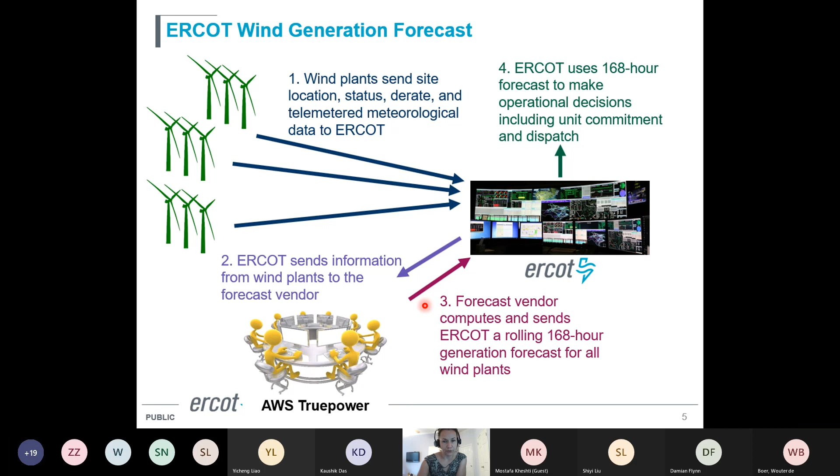So I mentioned in the beginning a little bit about our geography. So Texas is big, and Texas is also long. So if you look at it corner to corner, Texas is 1,300 kilometers. And what I wanted to mention is that areas that are rich in wind resource are over here, this Texas Panhandle, it's called, and I'll talk a lot about this area today. So just wanted to point that out.

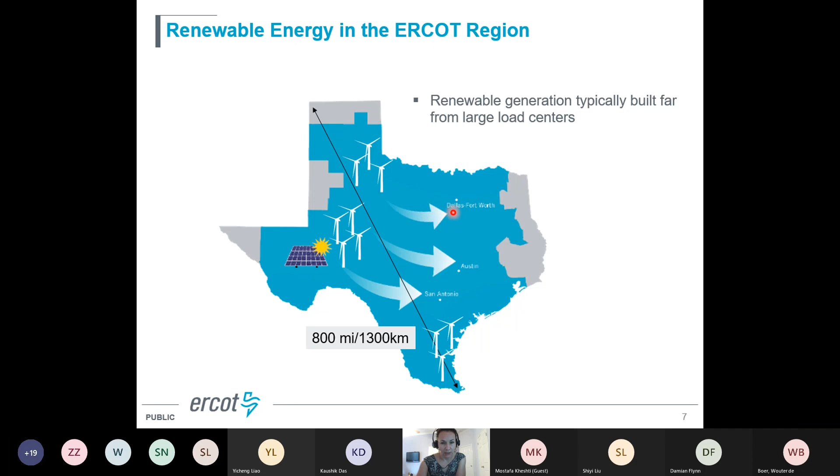And then also West Texas is rich in wind, and solar is being built there. There is a map from NREL that I don't have on slides here, but if you look at it, it's an irradiance map. The highest irradiance for solar potential is in this area for Texas. However, if you look at this map, the biggest cities in Texas are all on this side. So this results in long distance transmission from areas rich in renewables to load centers. And that has its own set of challenges that I'll talk about much more. So this is all I wanted to point out on the slide.

I'll talk next about two big groups of challenges, one being weak grid instability, and the other one being inertia and frequency control. I intentionally have them in this order because in our area, weak grid instability issues are much more pressing than inertia and frequency. And this is partly because of some measures we already implemented to address frequency, but also because of characteristics of our system.

And with that, there are stability challenges associated with weak grid conditions. What it basically means is you're trying to control voltage in this area, and inverters are fighting each other because they are all controlling voltage in a fast manner. And that resulted in voltage oscillations. This is a measurement from an actual event in 2012. And so after we recognized this issue, there were a number of measures taken.

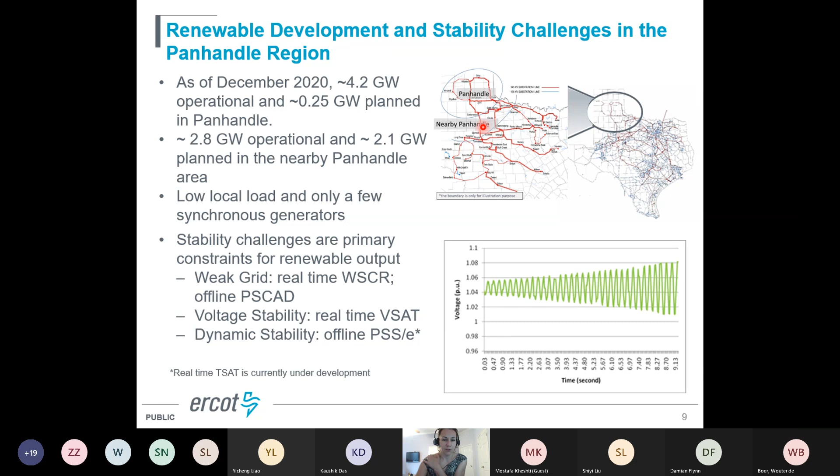And it brought two small synchronous generators with combined capacity of about 120 megawatts. So that area improved a lot because of this interconnection of Lubbock, and some of the measures that I'll be talking about are not in place anymore because of this. But I thought it was still interesting to mention those.

And so it may have overly optimistic estimation of system strength for a given bus. And so since then, for the Panhandle area specifically, we proposed this weighted short circuit ratio. It basically treats the entire Panhandle area as one bus, and it recognizes that there are other inverter-based resources in the area, not just the one that you are looking at during the interconnection process. And so it assumes that they are all interacting, and we proposed 1.5 as a minimum pre-contingency system strength for Panhandle. Initially, it was based on PSCAD studies, as I mentioned.

So currently, sorry, I'll just mention it here. We actually also verified this 1.5 short circuit ratio in electromagnetic transient studies. We found that at different conditions below 1.5 ratio, the system can be operated stably, but you need to be changing this limit based on system configuration at any given time. So because this became kind of impractical in real time, we set the limit at 1.5, and it's been maintained in Panhandle. Inverter-based resources, mainly wind in this area, are being curtailed as long as we see that weighted short circuit ratio is less than 1.5.

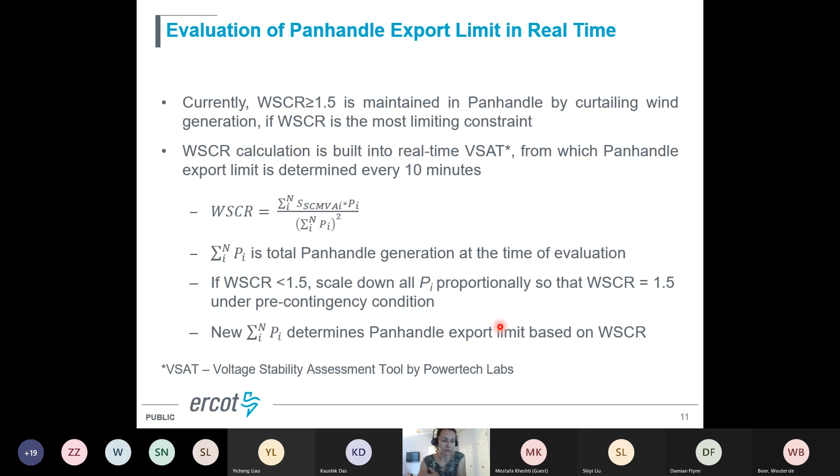When it calculates this limit, it of course considers current network topology and wind conditions and all of that kind of more real-time data. So this is just showing the real-time transmission limit, as I mentioned, either due to voltage stability or weighted short circuit ratio, whichever happened to be less at the time. And you can see that it varies over time. It is an advantage of doing it in real time because it allows us to operate more flexibly instead of setting a limit very low and then curtailing wind more than it should.

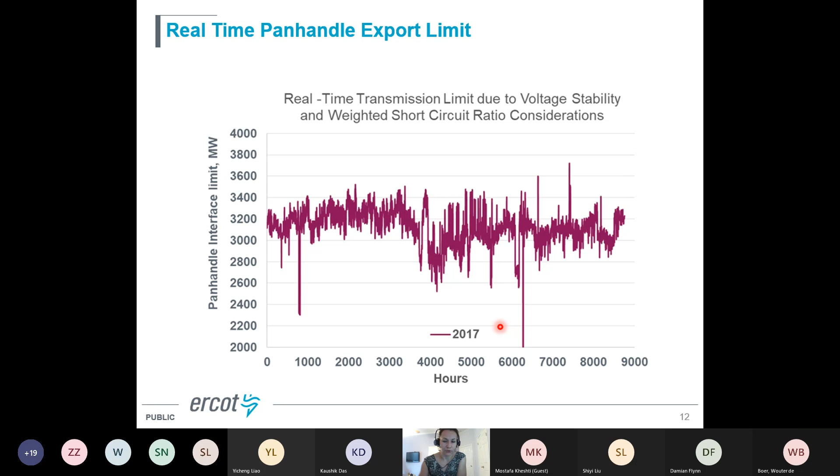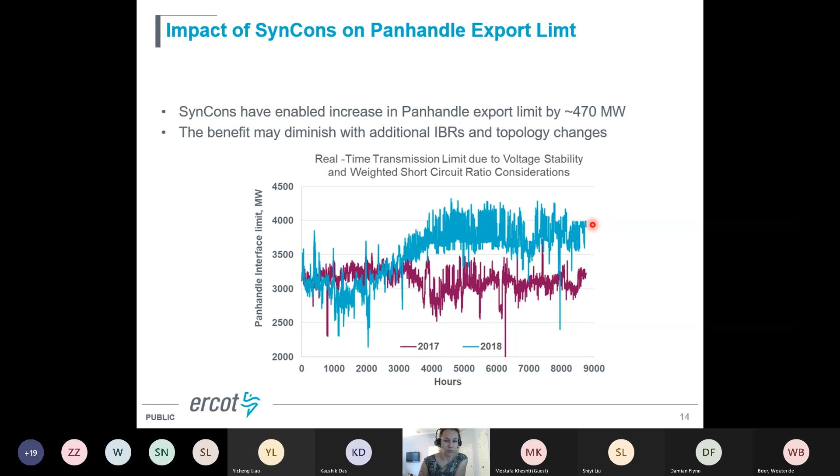And so here you can see, once we added the synchronous condensers, the export limit could be increased by about 470 megawatts. You can see this blue line. This is 2018, and when the synchronous condensers were added, you can see that the transfer limit is going up. But what happened when we added synchronous condensers is that we now had a situation where we have 2 relatively small synchronous machines far away from the rest of the synchronous generation.

As I mentioned on the Texas map, the Texas Panhandle is in the upper corner of the map, and all large synchronous generators are on the central to east side of the system. And so there is long power transfer between these 2 parts, and having synchronous machines there resulted in this kind of classical inter-area oscillation during certain wind conditions and system operating conditions. When export was high from Panhandle and we transfer a lot along these long transmission lines, after a contingency, we see oscillations between the synchronous condensers in Panhandle and the rest of the grid. So basically solving one problem of weak grid by introducing synchronous condensers introduced another problem of these power oscillations.

What could have been done in advance, had we thought about this problem? Probably there are synchronous condensers that are equipped with power system stabilizers, which a regular synchronous generator would normally have. And our synchronous condensers are not equipped with that. I'm aware of synchronous condensers installed in Australia, and they have a flywheel for inertia, and they have a power system stabilizer to avoid these oscillations.

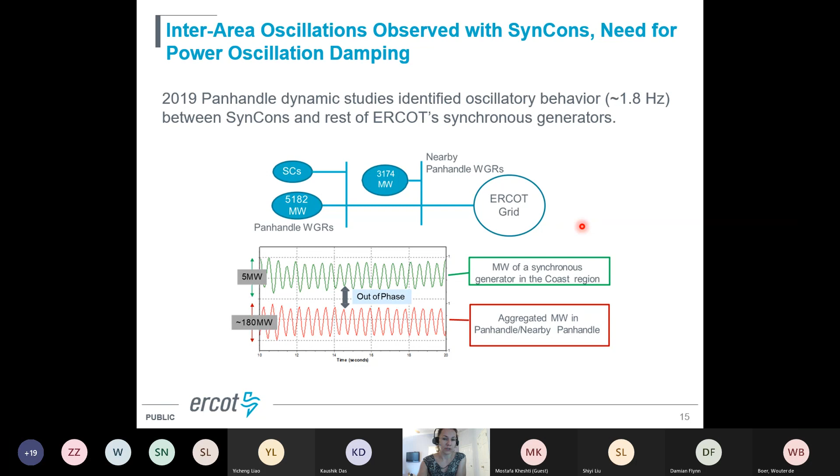But in the stakeholder process, we got a lot of pushback saying that this is not a fully tested product, not commercially available. It requires a lot of testing and customized design for a given system and system conditions to work properly. So more work is needed to have this feature.

And so stability constraints need to be assessed in the offline studies, and then we need to implement them in our real-time market because we need to dispatch around those constraints in real time. And these constraints are not necessarily on just one line, they may be on corridors like Panhandle is. So they're relatively complex. It's not only about defining the constraint itself, but also about defining the limit on this constraint, and the limit will vary in time.

So we fix the constraint based on our offline studies, planning studies, but then closer to real time, based on topology at the time, we use offline static tables to determine what the limit is on the constraint at any given time. And you can see we are seeing an increasing number of these constraints. In 2020, we had 15 of those. And so they're becoming hard to manage, and they complicate our real-time economic dispatch as well.

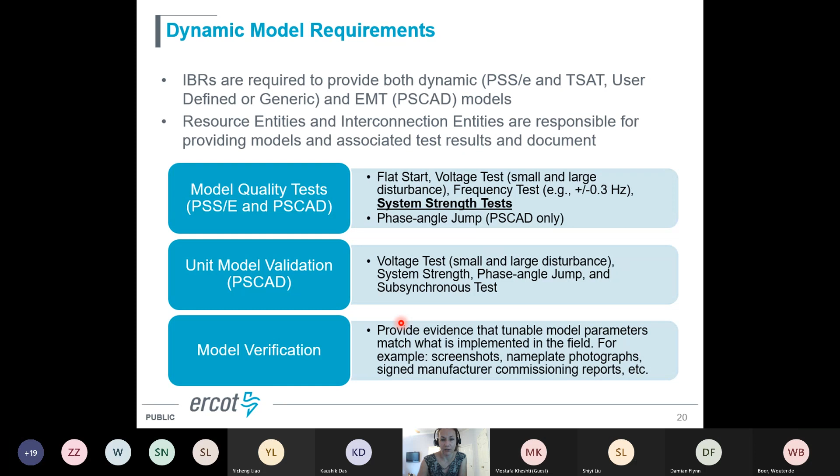And so recently we developed a process for them to test models on their side. It gives them a small test system where they can connect the model of their plant and do different tests. And they have to submit to us a test report before we accept this model. The test report should show acceptable responses and that there is consistency between PSCAD and PSS/E models. And only after that will we take the model, do our own verification, and then plug it into the rest of the ERCOT grid model.

So just in summary on weak grid and stability, as inverter-based resources are being developed in areas away from load centers and synchronous generators, we see an increasing number of stability constraints because these are weak grid areas. We noticed that simple metrics such as the weighted short circuit ratio may not be applicable in areas where you have load and other synchronous generation. It was very clean and clear for the Panhandle until we got the city of Lubbock interconnecting.

And we also noticed in South Texas that the weighted short circuit ratio could not be uniformly used in a similar way because the network is more meshed and has more synchronous generation and load there. Synchronous condensers are a good help for weak grid areas, but they also introduce other challenges for a grid like Texas. There are limitations of available dynamic tools and models that we can encounter in weak grid conditions.

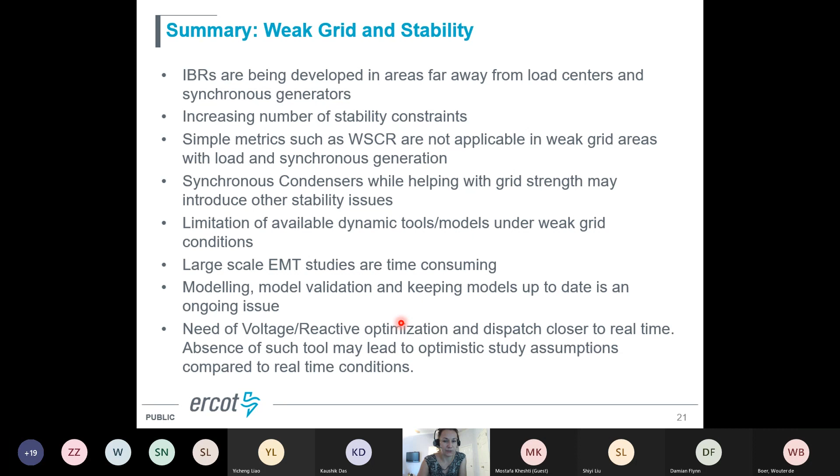Large electromagnetic transient models are time consuming, so we cannot do a big number of studies or do them in real time. Modeling, model validation, and keeping models up to date is an ongoing issue. And we're also looking for voltage and reactive optimization tools that could dispatch closer to real time. In the absence of such tools, the operation may be suboptimal and too optimistic compared to real time conditions.

So with that, I'll switch to inertia and frequency. I'll try to save maybe 15 minutes for questions, so I'll zoom through it a little bit faster.

So, you're probably all aware that the higher inertia you have, the lower rate of change of frequency it is after a trip of a large generator. Did I say the lower? So the higher inertia is, the lower rate of change of frequency is, and the lower inertia is, the higher rate of change of frequency is after a trip of a generator.

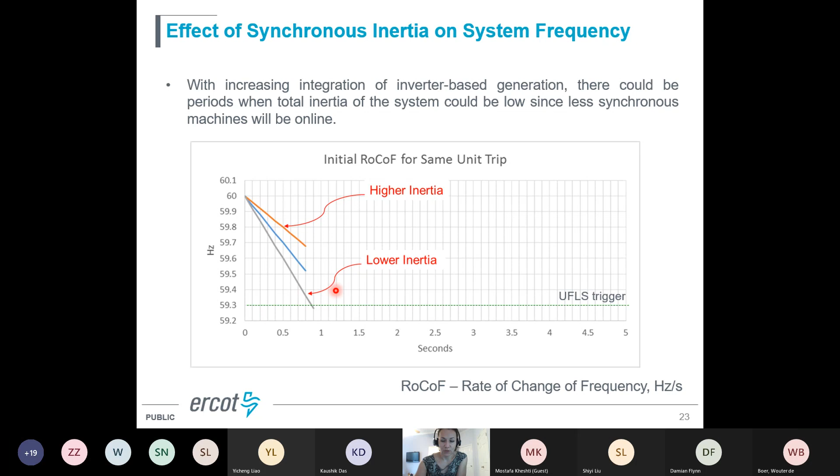And so if inertia is low, there is less time available before frequency falls too fast and reaches a trigger point for under frequency load shed. And this time is the time we have to arrest frequency and restore it back to 60 hertz. So this time needs to be taken into account when we implement measures for frequency control.

So we recognized that that's what's going on, that inverter-based resources are replacing synchronous generators. Inverter-based resources inherently don't have inertia. And so we started looking into that without seeing any issues on the grid. Actually, it was kind of preemptive from what we've seen happening elsewhere. And so in 2016, we implemented real-time inertia calculation.

We use inertia parameters of individual synchronous generators, and we use the online or offline status to calculate inertia for the entire system. We have telemetry from every generator with a lot of information in real time, and we get updated information every 4 seconds. So that provides an accurate account of what inertia is there from generation.

And of course, motor load also provides inertia contribution, but we cannot track it because we don't have real-time telemetry from it. So what we do consider is, when we do studies of how much inertia we need, we have load models, and part of these load models are motor loads. So we do consider motor load in the models, because when we determine how much inertia we need, that inertia is only related to synchronous generators.

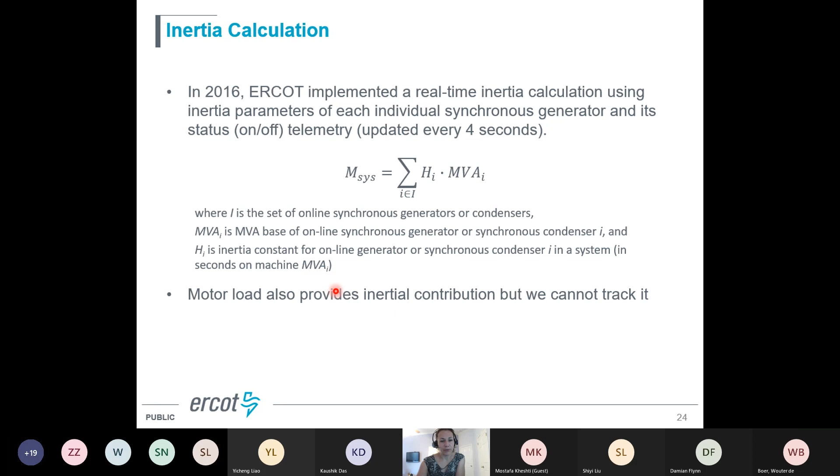But it's also, of course, not accurate, because in real time you may have more motors or fewer motors on than what we had in the model. So we do consider it, but it's not real-time accurate. That's what I wanted to say.

But what we use here is the intended status, and we use that status to calculate what inertia is going to be going forward. Of course, these plans are more accurate for the next maybe 24 hours, and then they're not very accurate, but we also don't need to forecast inertia that far ahead. And as I mentioned, they update those plans every hour, so we have an opportunity to update every hour.

We also split by generation type, but we don't use this in operations. This is just for historic analysis, for trending analysis. We've calculated what our critical inertia is, and we define it as a minimum level of system inertia at or below which the system cannot be operated reliably with the frequency control practices that we have in place today.

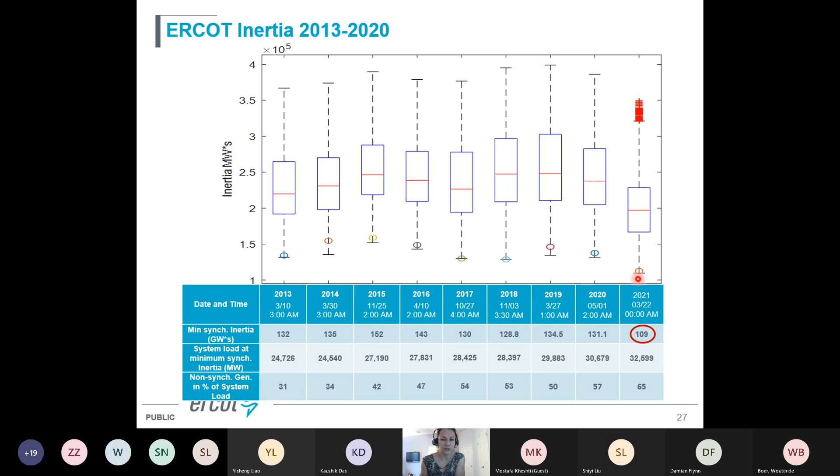We did see close to 100 gigawatt seconds of inertia this year. And we are still kind of looking if this will repeat itself. We had a lot of wind in this March, and also a lot of plants on maintenance during this month of March, and so maybe that's what affected it. But it could be an outlier. We are not sure if we'll continue seeing this trend in the coming years. But this is primarily due to several factors.

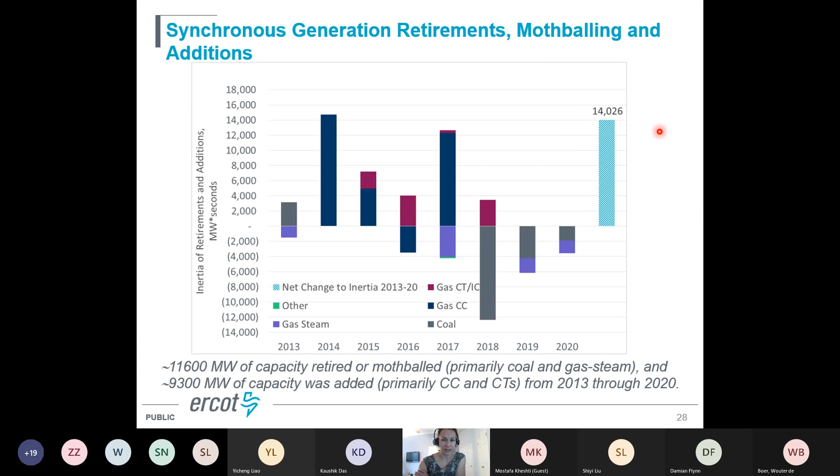And just to mention, a combined cycle unit of the same size as a coal unit has 1.5 times higher inertia. And this is because it has more rotating parts and more mass, and so provides higher inertia. So overall, this entire retirement and installation of new synchronous generators resulted in a net increase of inertia in terms of installed inertia that we have. So it's not necessarily that all of this is online at any given time, but in terms of what we have installed, we actually added inertia to the system, and that is one of the explanations why the trend is not declining.

I mentioned frequency response measures that are important, and the timing of these measures is important if your inertia is lower and the size of your contingency is large. So previously about 50%, now it's 60% of frequency containment reserve was provided by load resources with under frequency relays. The second half was provided by generation resources with governor response or primary frequency response.

We recently added fast frequency response service as well, and this is 1/4 second response time, full response, and sustained time is 15 minutes. And so this one is to address times when we have lower inertia, and this may help us to reduce the amount of frequency containment reserve that we're carrying.

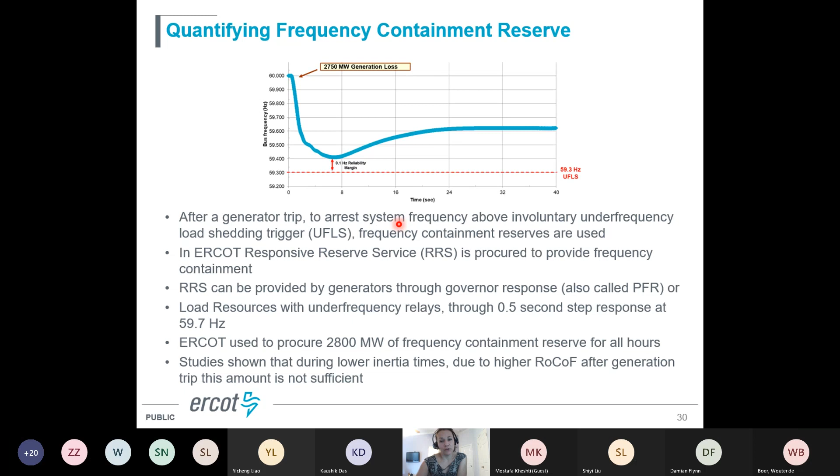You know, I'm kind of running short on time. I think I'll skip a couple of slides here. This basically is talking about the method that we use to determine varying amounts of frequency containment reserves based on inertia. And so that resulted in, and this is an important chart here, I think, at different inertia conditions, we require different amounts of frequency containment reserve.

So this chart is showing if your frequency containment reserve all comes from governor type response, how many megawatts we need at each inertia level. And this is all determined based on studies, and I have a method described a few slides previously. And as I mentioned, we have these faster load resources that respond in a step kind of response within half a second of reaching the 59.7 hertz frequency trigger. So this response is faster and it's more effective during low inertia times, and that's what we noticed.

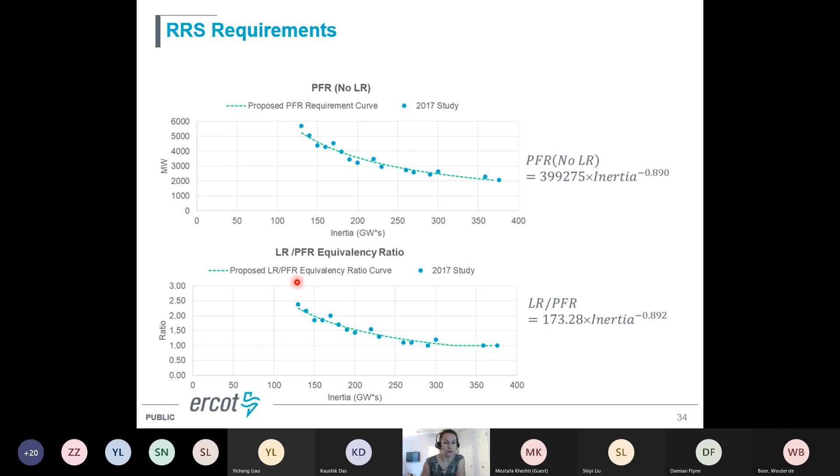So what you can see here is the equivalency ratio between 1 megawatt of load resource versus 1 megawatt of primary frequency response or governor type response from a synchronous generator. And so you can see here that as inertia becomes lower, this step and fast kind of response becomes more effective. And that allows us to reduce the total amount of required reserve if we have participation of these load resources. So this is showing the kind of heat map based on expected inertia conditions, and then we are looking at history, 2 years of history, how much reserve we need at any given time.

So this is hours of the day, and this is months of the year. And so depending on expected inertia conditions during some periods, you can see here in summer, we need very less frequency containment reserve. And this is because inertia is high and everything is online to serve load. But during shoulder seasons, as I mentioned, we have high wind, low load conditions, inertia is lower, and we need higher amounts of frequency containment reserve.

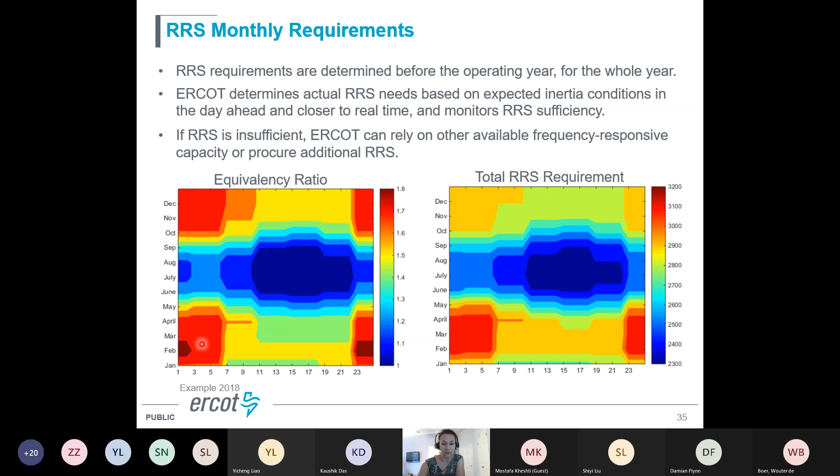This one is showing equivalency ratio. So again, equivalency ratio is 1-to-1 during high inertia conditions in summer, and load resources providing fast response are becoming more valuable during shoulder seasons when inertia is low. And I'll skip this and go straight to the summary.

So from inertia and frequency containment reserve perspective, we observed that on average minimum inertia level was relatively constant in the past 7 years. Minimum inertia to date that we've seen is 109 gigawatt seconds, but prior it was 128 gigawatt seconds. It was all-time lowest. So we only just first time kind of got close to 100 gigawatt seconds this March. Right now, critical inertia is determined 100 gigawatt seconds.

We do monitoring and forecasting of inertia in the control room, and the system operator has some measures in place to bring additional generation online with more inertia if it's needed. We determine our frequency containment reserves based on expected inertia conditions, and that allows us to operate more flexibly and procure more when we need more, and procure less when it's not needed.

This fast frequency response ancillary service was implemented in March 2020. Full response within a quarter of a second to a frequency trigger of 59.85 hertz. And with implementation of this service, and once it's fully subscribed, we can actually reduce our critical inertia level, because now we have faster frequency response. And from the studies, we can see that we can go from 100 to 90 gigawatt seconds.

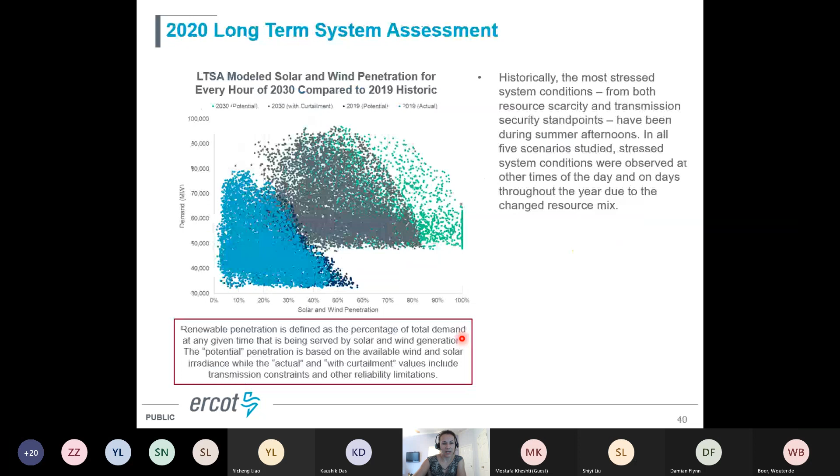Maybe one interesting to stop here very quickly. This is a slide that I have. I think we are doing fine with respect to time, Julia, so don't worry. Okay. Yeah, so I think I'll still just kind of talk about this one and stop there.

So this is a slide I put together talking about grid forming inverters and requirements for grid forming inverters. But this slide, I think, also fits for any requirement that is not yet commercially available. So, as I mentioned, you probably realize by now, as we introduce more and more inverter-based resources on the system, needs are changing, and some services that we need are changing, and we would very much like inverter-based resources to be part of the solution and provide these services.

But for us as a system operator, it's becoming challenging to require things that are not commercially available. So like in the example with this power oscillation damping, this feature is not commercially available. So we get pushback from the market when we try to go out and require this. And I mean, rightfully so, they also have to go and procure it somewhere. And so what it leads to, in the absence of these capabilities being provided by inverter-based resources, we say, okay, this is a stability constraint. We need to set a limit here. And so this leads to operational constraints that I was talking about in my presentation.

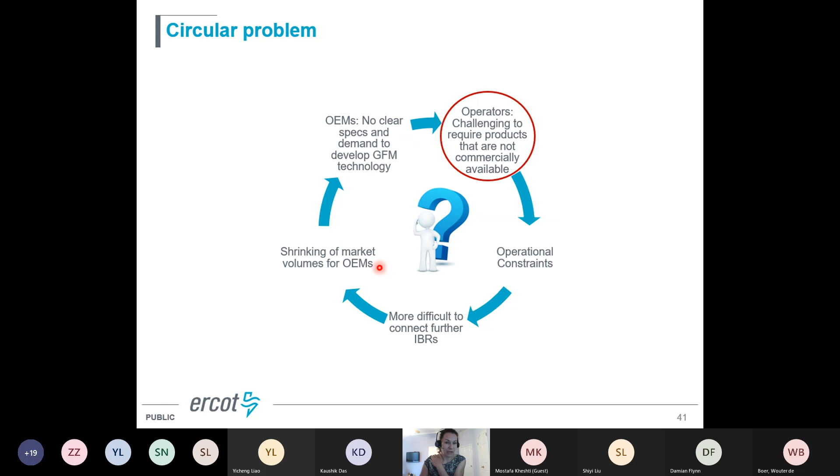So this results in shrinking markets for manufacturers because less inverter-based resources are being built. And then on the other hand, manufacturers are telling us, oh, you know, inverter-based resources can do much more. It's control. We can design different control features. So what do you need? And so this circle kind of closes, because we cannot require what we need right away, but then the manufacturer needs to know what we need to develop products that we need.

And I've recently done a webinar looking at real cases, real life cases where grid forming inverters were installed. And one of the things I noticed is that these projects are very custom made. So each project is designed for a particular requirement in that specific area. So say they had some need for inertia. So there it is, a grid forming project that provides inertia.

And then in a different area, there is a need to operate stably in a weak grid area. So there is a requirement for this grid forming inverter to do just that. And so there is no harmonization yet of what a grid forming inverter is supposed to do or what it can do. And a lot of projects, I feel like they need to be tuned to certain grids and services that are required. So there is much more work to be done.

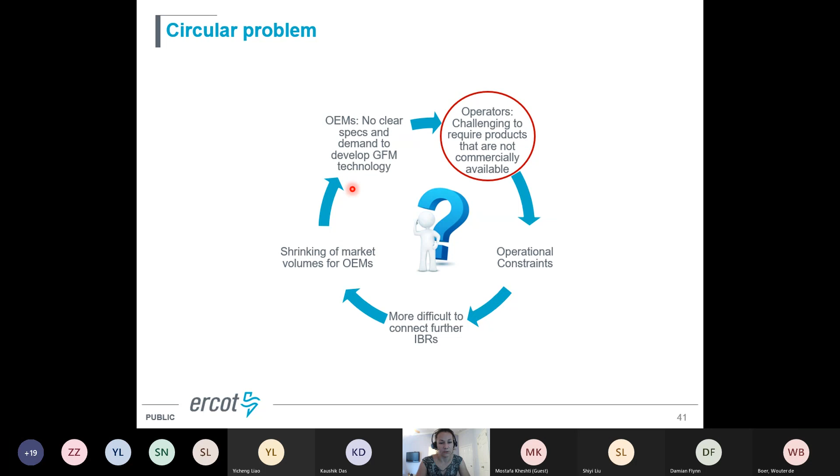It's good to see that there are pilot projects already happening, and there are also some system operators around the world that started looking at what are functional specifications for grid forming. And so currently in ERCOT we are not doing much proactively in our area, but we are looking out to learn from others' experiences and hopefully come out with either a service or interconnection requirements for inverter-based resources to support the grid and provide functionalities that we need for the system.

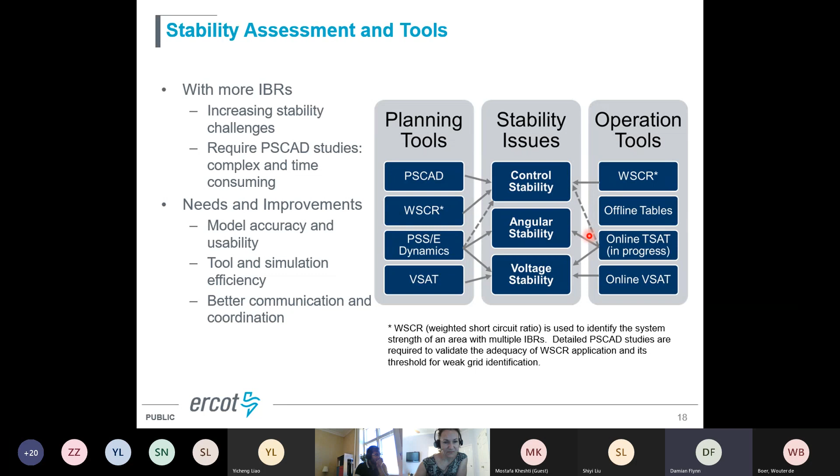The main question I was going to ask you was that you talked about the various stability analysis that you did and how you identified that you had problems. What I wondered was, how do you decide the next stage in terms of what are your corrective actions, and how do you select corrective actions that are, I suppose, minimum effort?

For every generic transmission constraint that's been defined based on stability, we need to propose, I don't remember timelines, unfortunately, but we need to propose some exit plan. But for an exit plan to be approved, it needs to be either needed for reliability or economic. And curtailing or dispatching down generation is considered an allowable action. So it may only show economic if, by not curtailing, we can reduce overall energy costs on the system. So any additional transmission needs to be justified this way.

And so we periodically look at each of these generic transmission constraints. They've been introduced at different times, so there's a timing periodicity with which we look at those. We run studies, reevaluate different solutions, and once we find a solution that's economic or absolutely needed for reliability, then it's implemented. And also as a part of some planning studies, we evaluate a broader spectrum of transmission solutions that may relieve some of these generic transmission constraints as well. I hope this answers the question.

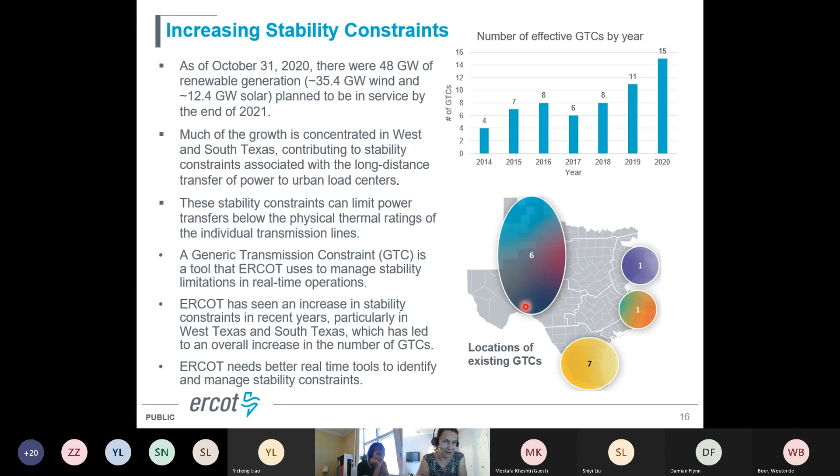We saw batteries being co-located with gas turbines in some instances. There are actually more projects where batteries are co-located with gas turbines than batteries co-located with wind right now in the interconnection queue. And what they want to do with this is going back to ancillary services. Some of the ancillary services are required from generators in online state. But if they co-locate with a battery, the battery can start providing service, and then the gas turbine will start. So that allows them to turn the gas turbine off and still sell ancillary service that's required from an online resource. So that's kind of an interesting thing that we see.

Yeah, that's very interesting, because both of them try to provide very fast services, and it's like one way of hybridizing the storage itself in that sense. Right. But then that also provides them opportunity to provide PFR, because the battery can start providing PFR, and then the gas turbine will come on. And for PFR, sustain time is up to an hour. We've never been in a frequency event for an hour, but theoretically it can be required to stay on for an hour.

Right, exactly. But then I will ask one more question, and I will presume Anka will forgive me for that.

The real-time inertia calculation, it's a two-part question: do you do it at the complete system level for the whole of Texas, or do you also divide it locally within Texas? And the second part, except for monitoring whether it's close to critical inertia, do you have any other application of real-time inertia calculation?